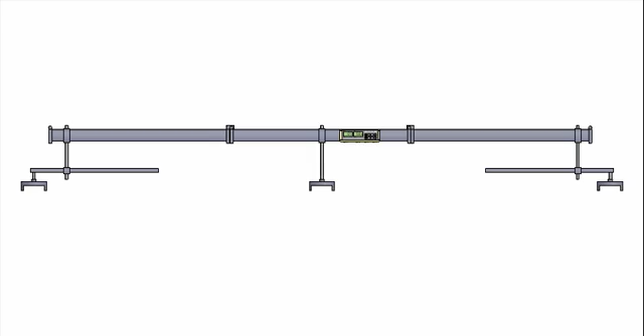The Big Multiplex Ski expands the advantages of the tried and tested sonic grade sensor in the longitudinal plane. Three sonic sensors attached to a beam cover a total distance of up to 13 meters.

Like all sonic sensors, the Big Multiplex Ski is highly flexible and has a large measuring range of plus or minus 10 centimeters. The Big Multiplex Ski is suitable for leveling out all kinds of irregularities.

The averaging of values from multiple sensors also allows the leveling of extended longitudinal undulations in the base that a single sensor would not detect as a fault.

What's more, the generation of an artificial reference, such as the time-consuming tensioning of a wire, can also be dispensed with when using the Big Multiplex Ski.

The average of the 3 measurements, which can also be below the surface, is sent to the Niveltronic grade and slope control system, which controls the screed.

Thanks to the beam, which can be built up by extensions, the Big Multiplex Ski can be used in variable lengths from 5 meters to 13 meters.

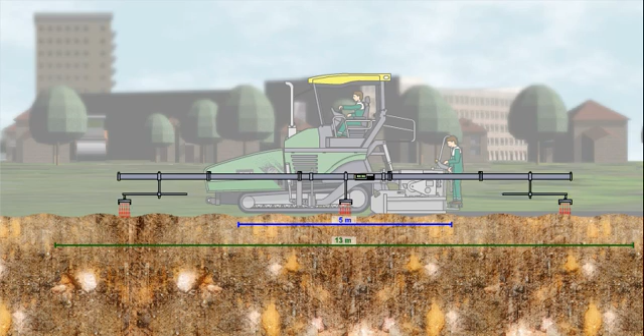The beam consists of several components. The individual sensors can be displaced on the beam, allowing the ski length to be optimally matched to all job site conditions. The ski length most commonly used in practice is 9 meters.

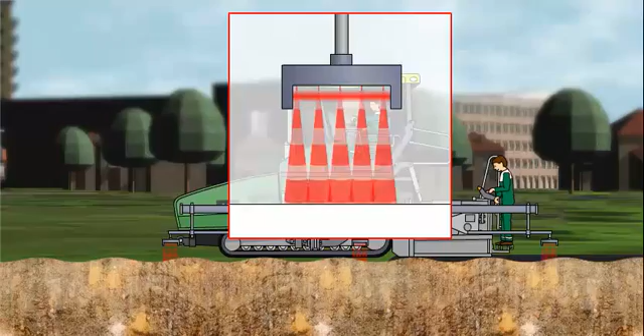Each of the 3 sensors operates according to the same principle of the Vögele sonic grade sensor. Obstacles are automatically excluded from grade measurement, thus ensuring that the correct data is always used for working.

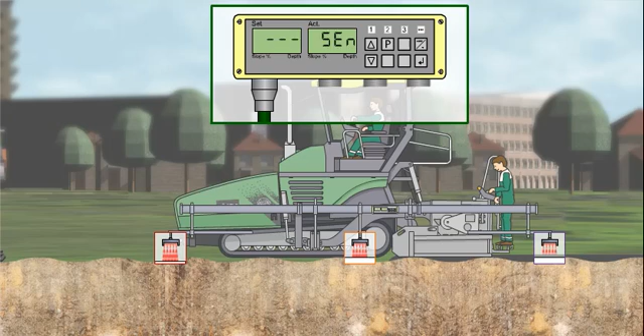Setting up the sensor is child's play, thanks to the very simple user menu of the sensor control unit and the screed man's console. Every sensor is indicated on the sensor control unit via LED. The sensor arrangements are also shown on the display. All that remains to do is to acknowledge automatic sensor recognition.

This, however, is only necessary if the Big Multiplex Ski is connected for the first time or if its sensor combination has been modified. Prior to starting work, the sensors are zeroed with the reference.

In other words, the value currently measured is defined as the target value. This is realized by simply pressing the Set Sensor button. The zeroing process is completed once Set is displayed on screen.

Pressing one more button on the Niveltronic Plus operating console initiates the quick calibration function, and the sensor is then ready for use.

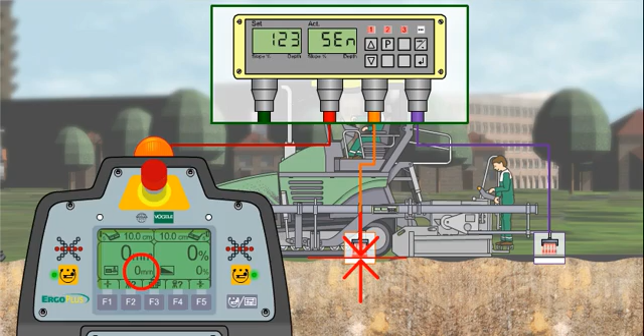The Display Parameters button calls up the value of the sensor work window on the display. The work window can be limited to specify the range above or below the target value in which objects are to be considered as references for grade and slope control.

The work window is active in most paving situations in order to automatically exclude interfering objects from the measurement. In some cases, it may be useful to deactivate the work window.

One such case would be when the screed planing angle undergoes an extreme change during paving, and the height of the front sensor consequently changes by more than 10 centimeters.

As the sensor is outside the work window in this example, the Niveltronic system would stop the screed toe point rams. The work window is deactivated in such paving situations.

The possibility of activating and deactivating the work window, as well as the large measuring range of the Big Multiplex Ski, means that the paver can be ready for work without time-consuming refitting.

The Big Multiplex Ski allows perfect joins to be established to existing surfaces, like at the end of milled areas, without grade and slope control having to be manually adjusted.

To this end, the front sensor is mounted next to the front end of the crawler tracks. When the paver crosses the milled edge, the front sensor registers the comparatively large change in screed elevation.

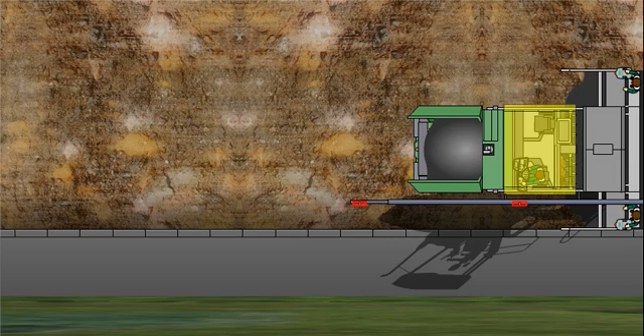The Big Multiplex Ski can be attached in two ways. Attaching the sensor beam to the screed arm allows the base to be scanned within the pave width.

The special benefit of this is that the freshly paved surface behind the screed is part of the reference and is thus taken into account for controlling the current grade.

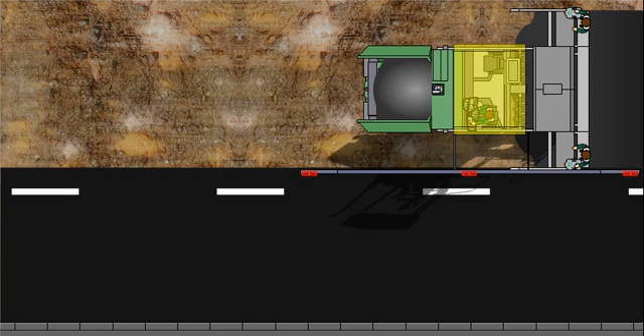Alternatively, it's preferable to attach the beam and sensors to the end plate for scanning if the reference is outside the pave width of the paver.

The front and rear sensor bracket can be pivoted by 90 degrees so that the front and rear sensors can be adjusted by approximately 1.5 meters to the left or right.

This allows the freshly paved surfacing behind the screed to be scanned if the beam is attached to the end plate.